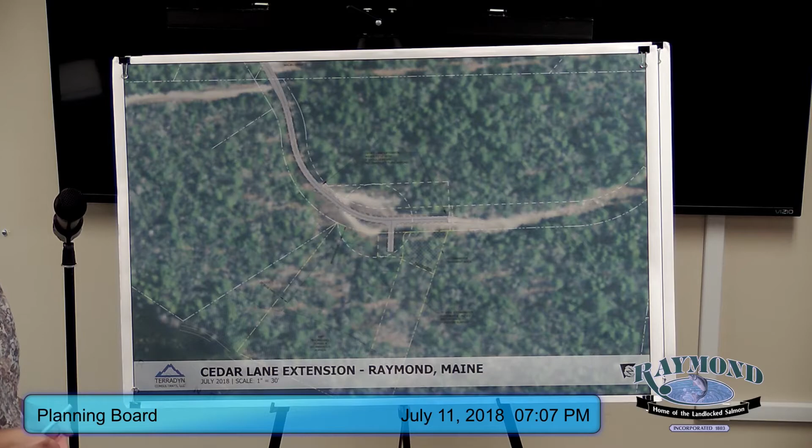We have two different roadway cross sections that we're proposing. We've talked about this a lot with the planner and code enforcement, and looked at the stormwater management for the site and protecting Panther Pond. We came up with this best approach.

The first section from Sloan's Cove Road down to Malibu Drive is going to be a 16-foot wide travelway with 2-foot gravel shoulders on each side, which meets the standards for a private way serving 4 to 10 residents, with the exception of that shoulder, where we're asking for a 1-foot reduction from 3 feet to 2 feet. That is one waiver we're asking for.

That will keep the roadway generally within the extents of the gravel that are there today, but improve the section so it's a defined travel way with defined shoulders, clearing vegetation back so it is a safe, accessible route, without clearing too much, changing the nature, or creating more stormwater than necessary near the pond.

After Malibu Drive, this portion of Cedar Lane only serves 3 residents, so we're requesting that we transition to the cross-section allowed in the ordinance for private ways serving less than 4. That would be 12 feet wide with 2-foot gravel shoulders.

Again, that's so we can keep the roadway generally in areas of gravel and maintain stormwater patterns. There are some existing ditches here that we're going to connect to and direct stormwater to, to manage phosphorus export and erosion control.

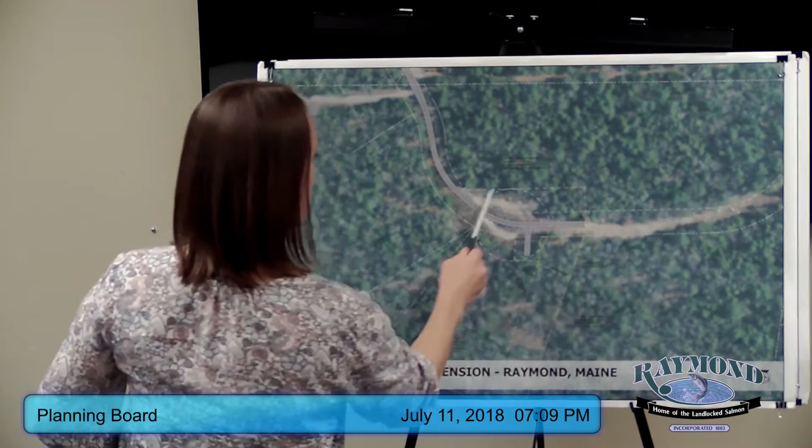This is all owned by the Yazbeks. At one time, this, this, and this circle were older right-of-ways that are being released as part of this to define the new right-of-way around the hammerhead.

This portion of it was created when the road was going to connect in a different location. There was a different right-of-way in place.

Well, I guess my question is, are we going to be back here in 1 or 2 or 3 years having the same discussion when additional lots are going to be developed?

I can answer that. We've had discussion with Mr. Yazbek. He has no intention of developing that. In fact, he wants to put it in conservation. It's all tree growth land now. He's adamant about it.

So I think the next piece is the Toles property, yes, and the same with them. And then the land up above is all accessed from Malibu Drive now, so.

So then I can show you this, which just has a little more detail of where we're really doing the bulk of the changes and construction. Everything else is just improving what's there and making some widened areas and better shoulders.

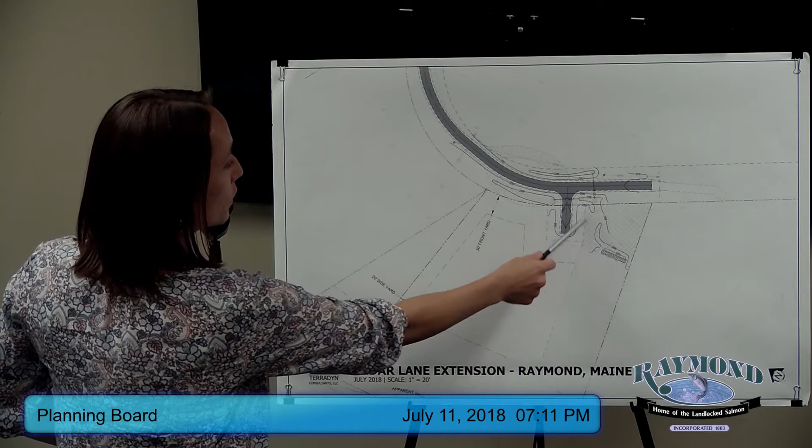This is where the biggest change is, so we'll be removing the gravel cul-de-sac, returning that to vegetation, which will help with stormwater runoff, and constructing this hammerhead to provide the frontage. We'll have ditching and culverts directing stormwater into this buffer area. All the stormwater report and phosphorus calculations were provided with our submission, and we believe we're sufficiently managing this.

Again, we're just asking that we don't have to widen the beginning of the road more than that 2-foot shoulder, to further help with reducing stormwater.

Does the planning board have questions? Yeah, I have one about the forested stormwater buffer.

Have you checked into that to see that the water's gonna flow where you want it? It's going to the Panther Pond, and laterally it's gonna stay in the property. The contours we have, everything is draining towards the pond. This area naturally today is collecting stormwater and running down this direction, so it seemed like a natural location to design this.

That will be a deed-restricted forested buffer and stormwater easement area. Fortunately it worked out that way for you, it's right where you want it. Well, yeah, they positioned it such that they can take advantage of that. That's why they wanted to pull the hammerhead back further.

Do we have any additional questions?

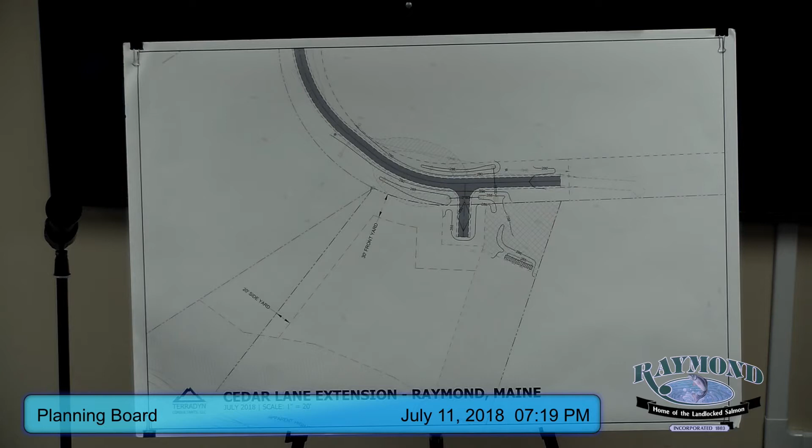Again, we're only accessing 3 lots down there, so it does give them ample room to back an ambulance or a fire truck and turn around per our standards. The other thing I've noticed is that by doing it this way, it's also going to help water runoff into the forested buffer. So there's an added benefit to that particular design.

Do we have any questions or further discussion before we move? No. May I have a motion to the floor, please? I'll move that we allow the applicant the hammerhead 55 feet from the terminus instead of 50 feet. Do I have a second? Second. What did you say the distance was again?

The distance isn't correct, it's actually back 135, I think. I'm sorry, I'm using the wrong number. It's all right, what is the number to use? The distance on the plan shows 135 feet to the center line of the hammerhead, roughly, plus or minus. I'll amend my motion to say 135 feet. Okay, we had a second made, properly made. Any further discussion? All in favor? Unanimous approval. Okay, now we have to get to the business.

Staff has recommended that we do this in 3 steps, if you will. We get all 3 on this one: private road, site plan, and shoreline zoning. So we can do this one of two ways. We've done the waivers, unless there's a condition attached to a technical issue, you could take them in a lump sum. You might just go through and get a poll, and if one has a conversation because of a condition or something, you can attach that, and then come back and move it all in one big motion. I like that. So you'd have essentially three motions with this, four. You'd have one for private road, one for site plan, and one for shoreline zoning, and then one for the whole final thing. Okay.

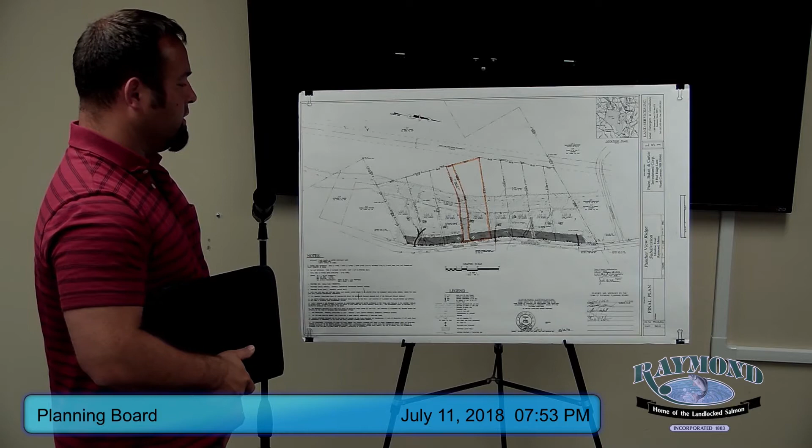At the time, I went through the files. I didn't see anything specific which talked about the design of any roadway in that 60-foot right-of-way. It was really just to provide some connectivity to that back piece.

There's a pole line as well, but it runs behind all the properties, so this is kind of a natural divide. The other homes are all on the Meadow Road side of the pipeline. The one exception here is this house, which had built out this roadway to a 15-foot wide paved road. They gave it a street name, Alfred Mann Drive.

There's currently 2 houses which utilize it for access, and they also have Alfred Mann Drive addresses. So this existing dwelling on lot 4, as well as the dwelling back here on lot 3, are the 2 dwellings that use Alfred Mann Drive.

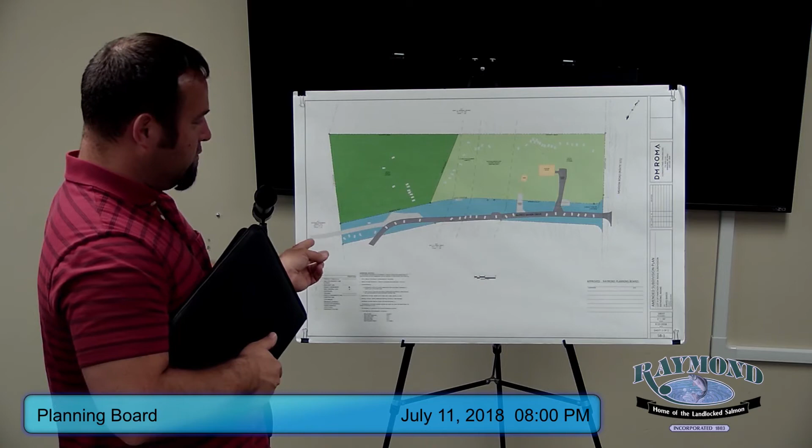One thing that would be a benefit to the site would be a formal turnaround at the end of this roadway. It was shown as a 60-foot right-of-way to access the rear land, so at the time it was set up there wasn't any intent for this to be a short dead-end road requiring a turnaround. But today we're now talking about a third house on this road, which essentially will function as a dead end. So it makes sense at this point to incorporate a hammerhead turnaround, which we'll design on our property and construct as part of the lot development.

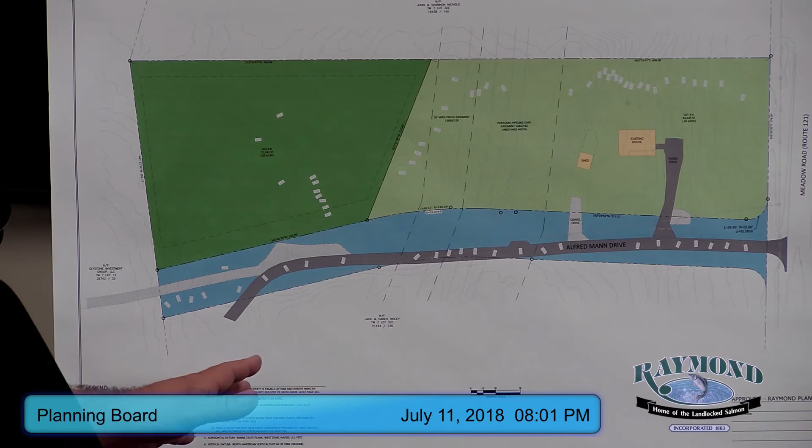Jim and I talked a little about stormwater management and what the ordinance requirements and expectations are. For the original subdivision, what they did was basically site the houses back. Panther Pond is on the other side of the road, so we're beyond the 600-foot shoreline zone, but within close proximity to the lake and sensitive to it, so we understand we need to do our part if we're doing further development to treat stormwater and provide erosion controls on the site.

Everything kind of drains in this direction. We're not sending any water toward the road that's going straight down toward the lake; it makes its way around this way instead. As I said before, with the pipeline being here, the backs of all these lots remain wooded.

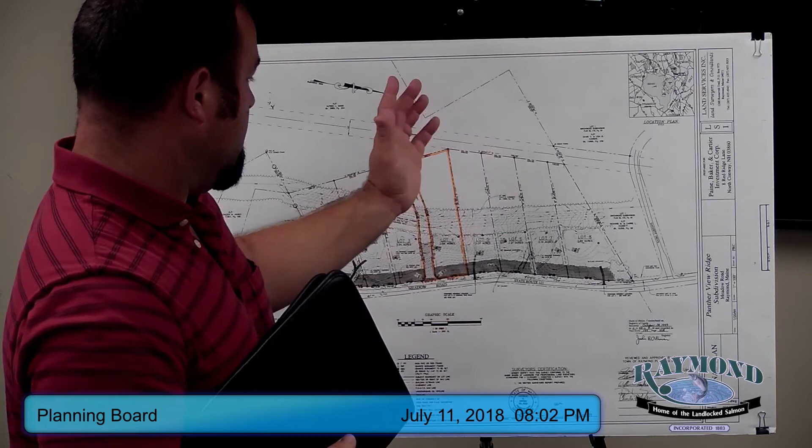You can see here the drainage pattern for this lot, number 4, comes down like this and then makes its way down this way. We'll provide some on-site retention of buffers, but once stormwater actually leaves the site, it makes its way down this way. There's lots of opportunity here where all the development is taking place on this side of the pole line, where the phosphorus is going to be removed just through natural drainage patterns that exist out there today.

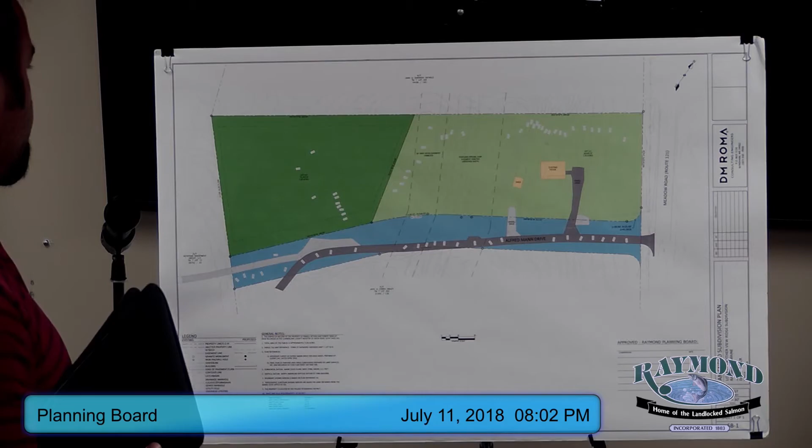So that's a summary of where we're at right now. We'd love to hear your feedback and things you'd like to see us elaborate more on when we come back with our full application, and we'll turn it over to you for some questions.

Okay, so I think we'll just open it up. Do you have any direct questions for our guests?

If you don't mind, can I step in real quick? This question will come up on this application and the next one, under the phosphorus ordinance. Really and truly, we can only impose phosphorus control when they're within 600 feet of the resource or the watershed. In this case, you're outside 600. The weird part is if it were site plan, we could, but under subdivision, we don't have that section. But we are requesting that each of these applicants, this one and the one that follows, do their best to incorporate some kind of measures for stormwater quality.

I think they're both going to abide by that to an extent, but I don't think either will go to the expense of computing that. But if we can at least see where the measure would take place, and in this case, if the drainage goes in this direction and they can utilize that as a buffer, that would be beneficial, and I think we can support that.

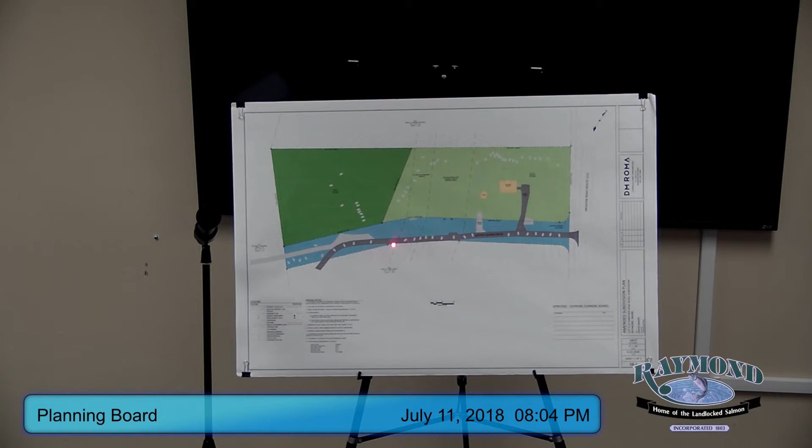This is the one piece I think we're having a little bit of an issue with — the road is not within, or is very close to the edge of, the right-of-way. It is a private right-of-way. We don't require it to be necessarily centered, but with that, any improvements need to be within the right-of-way. So I think that's a discussion the board might want to have: does the applicant have a way to improve that or shift it over so it's in the right-of-way, or is there any way they can extend the right-of-way to slide over so the blue is between the gray and the white here? And then the terminus — I think we're talking about a hammerhead, correct, in here?

So I think with all that, we'll be there. One thing I will add is that we didn't get comments from the fire department. I know on the one that'll precede this, there were some comments we received about putting sprinklers in, or maybe a cistern depending on the number of units.

Dustin, you may want to reach out to Wayne Jones, who's the new fire inspector for the town since we've had the unfortunate passing of David Maines. He will be conducting those, so you might want to reach out to him to see what the fire department may want. I know on the one after this, they've given them a few options of what to do. And I think sprinklers were actually, even back in '99, a condition of the subdivision approval for everything that was done to date.

Yeah, and that's the one other thing too — we'll need to take a look at all the conditions that were on the original subdivision plan, because they will apply to this lot. So when you put together that amended plan, just make sure you incorporate all of the conditions, waivers, and everything that were on the original plan. Because one of the things we're trying very hard to do is carry those forward in all documentation, so that there's continuity if it ever comes back again.

Do we have any general comments? I don't see that the board is adverse to the concept. With the rezoning in that particular area, it does open up the other side of the road for development. Is there any comments about that? Does the board have any opinion? We're taking these old 3-acre zone lots down, but it's allowable in that particular zone. No problem with that.

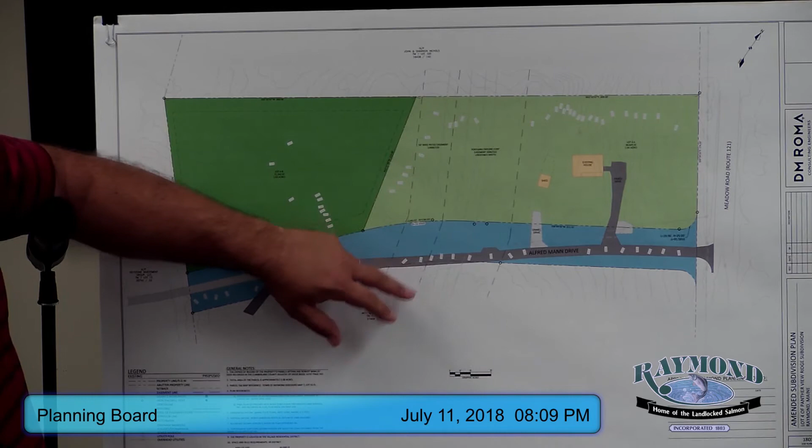When you cross the pipeline, as we know, that's another whole can of worms. If you relocate or do any other work there, you've got to deal with them. This was the only crossing of the pipeline; these other lots going through there are on the roadside.

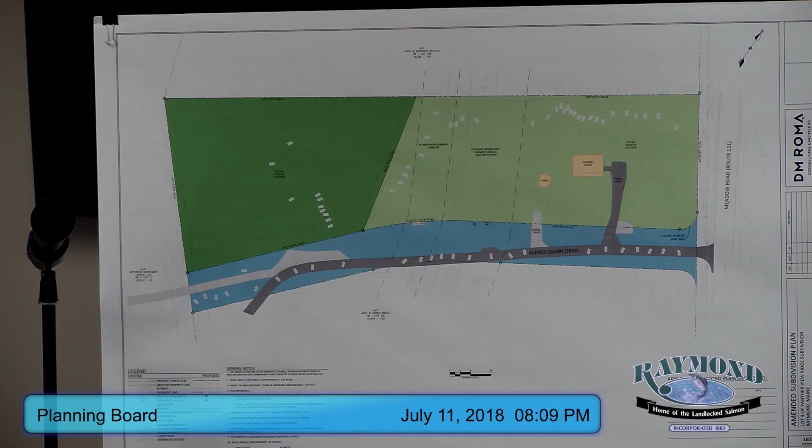Well, how does the board feel about that? Do you want to go see it, or do you think he can present a reasonable approach with his application? I'd be fine with seeing it on paper once it comes back. Paper's good enough? Okay, I think so. I'll submit some nice pictures of it.

And we rely on staff, you'll be checking it out too. And I think, again, if it is paved and a stable surface, then that's more desirable than to have it gravel or anything. Absolutely.

The other thing that comes up with a lot of these things is who's going to maintain this? I know you say it's being well maintained, but now we're adding people, how is the road going to be maintained? That'll all be firmed up in our application, it'll be crystal clear what's going to happen. Road associations are so much fun. We do our best to get them established, but then what happens afterwards is out of our purview. We should subject them to annual meetings, that's what we should do.

Any other discussion on this? I'm hearing the board is generally supportive of where you're going, Dustin. Are there utilities up through there? There's overhead power, I believe, that runs up the road. Okay.

There's actually a lot of really nice granite posts with private lights that run all the way down the road, with little gardens and trees. It's very well maintained, especially this stretch from the pipeline all the way back here. Again, there's a granite post with lights.

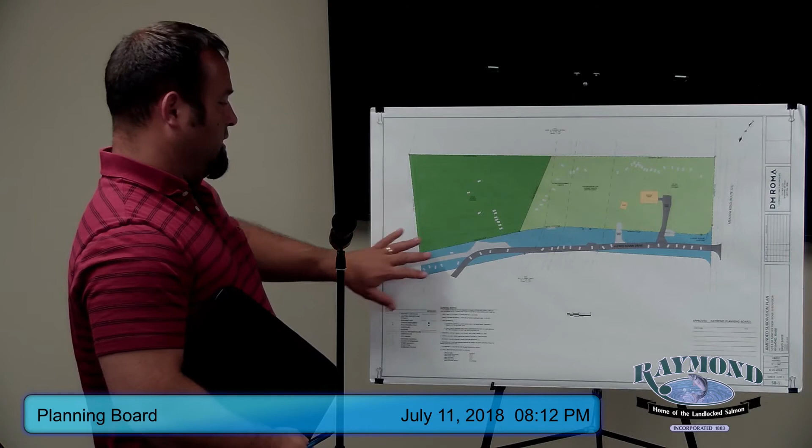We've got plenty of land, well above the minimum lot size, so if we had to put some more into the right of way that's fine. Again, the applicant is the owner of the right of way - they own it under their investment company on the abutting piece.

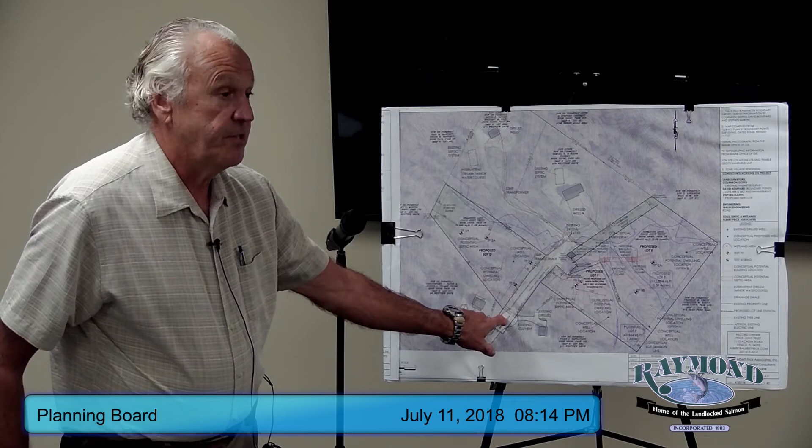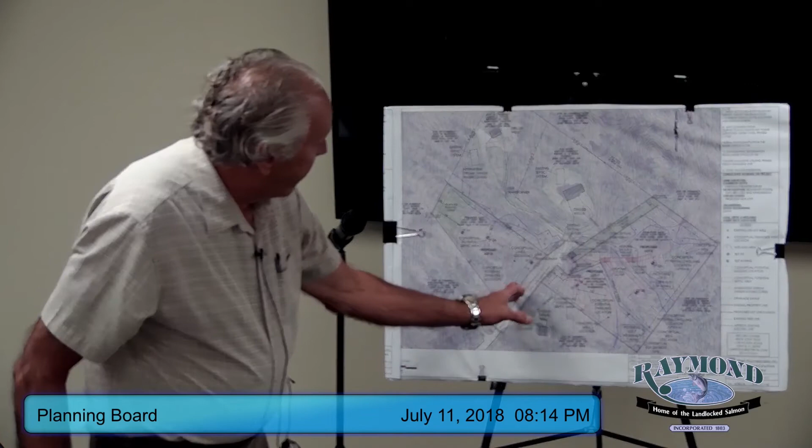My wife purchased the remaining land, which is shown on this site plan. I have the aerial here that shows the existing gravelled way and the hammerhead and the existing lots that have already been developed with code enforcement permits from Jack Cooper.

Subsequent to that, it was Will Cook. And then Chris Hansen followed up with this one. So they were all done with approval from the town. But what the proposed subdivision consists of is about

5.2 acres of the remaining vacant land. And if you look at the application, toggling between tabs 2 and 7 would show the tax maps and the dates that they were developed. So everything below this was developed in the late 1980s - the existing houses.

This lot, map 8, lot 48A, was sold and developed in 2001. My wife sold it to her brother James Mancini, and it was subsequently developed. This lot, 48B, was sold to my son, Grady Frick, who developed the lot in 2006.

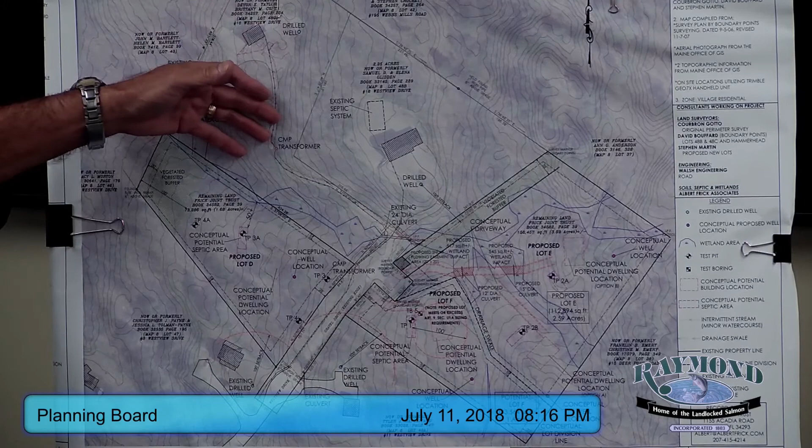And then this lot, which is 48C, was developed in 2010. We held title to that, myself and my wife, and my son Colin Frick built the house here, and it has since been sold. So these 3 lots are developed with single-family dwellings.

The town has the vacant land as map 8, lot 48, and it includes the parcel on both sides of the Westview private road, which now is a private road extension.

So what we're proposing to do is develop 3 lots. This lot on the westerly side is 1.68 acres and has the required frontage. On the opposite side, we're proposing to develop 2 lots, one of 1 acre in size, and the other one is 2.59.

And they all meet, to my understanding, the frontage and size requirements, and also the requirement under Article 9, section U1A, as far as having a 100-foot circle for an adequate house site, as demonstrated.

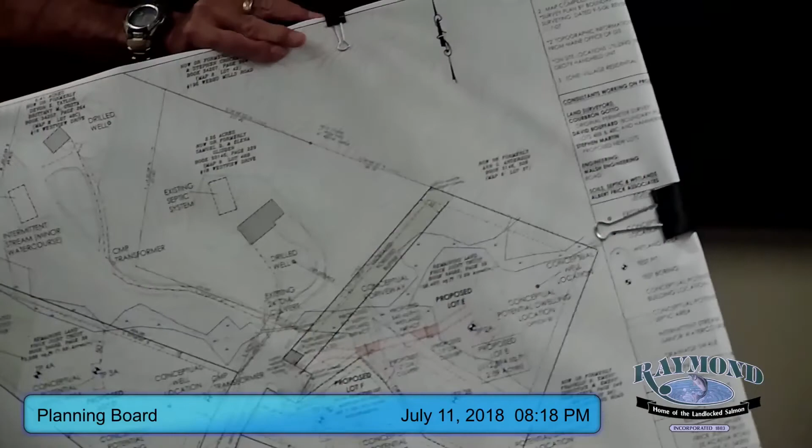Get some feedback from you with regards to phosphorus. Jim had mentioned to Dustin previously, I had read Article 9, Section U5A1, that phosphorus is subject to lots within 600 feet of a great pond or within 100 feet of a perennial stream. This parcel is 4,400 feet from Panther Pond and about 3,000 feet to Hayden Brook, which is the closest perennial stream.

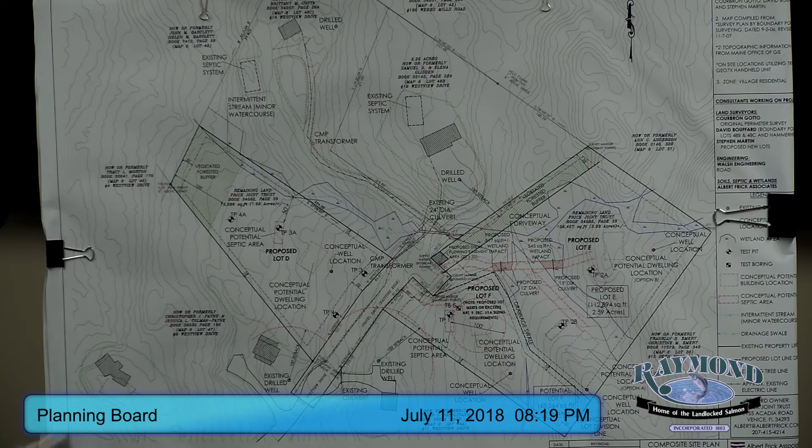So I was wanting to provide a forested buffer, but because some of the previous lots have been pre-developed with no requirements, and the difficulty to provide that with the drainage, I was proposing to cooperate in spirit but not be subject to the phosphorus program. That's what I wanted to get some feedback from the board on, that suggestion.

Well, I think, Jim, you mentioned earlier that based on the siting of these lots, the phosphorus control plan calculations, all those good things are not required. Is that correct? Correct, and I think in this case too, you've got a portion of that road already in, it's gravel. So whether it's gravel or pavement, it's already been built.

I guess the one thing I'll go back on real quickly is that this lot 8 was part of the parcel to remain, part of the original Westview Estates. And not that it's anyone's fault at this point, but any amendment to that lot, because it was part of a subdivision, should have come back even if it was a family subdivision, just through the formality.

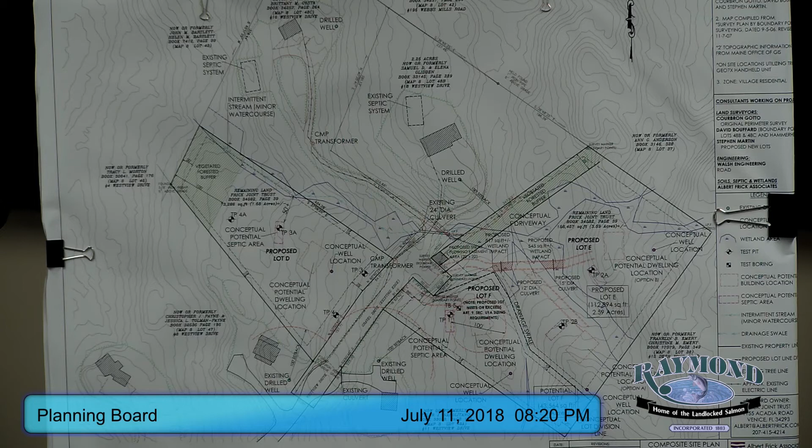But what we're going to do is just catch everything up at this point, even though these are two out parcels that have been developed. He's got them shown on here. We're only really looking at 3 lots, but again, it's just kind of a cleanup of the whole thing.

With regards to stormwater, he is correct. We don't really have anything in our ordinance to mandate he do phosphorus. I think what he's offering is a great start. I think the only thing we really have under the subdivision is quantity, so we will want to make sure that, maybe with the use of buffers, you can prove that you meet the peak rate of runoff, because that's really all we have in the subdivision ordinance for stormwater management.

And you've got quite a bit of land, even with the 5 lots, so with the buffers you may be able to reach that. I just don't know, spread it out, do whatever.

So that's one concern. He did get comments today from the fire chief and Mike Dustin. There are some options for a pond, a cistern, or sprinkler systems. Like Dustin's, the one you just saw before, I think we've already discussed that any of the conditions that were on the original subdivision plan would carry forward to this one.

And that was the only thing we were trying to figure out, the phosphorus - did it require phosphorus? Probably in 1986? No, probably not. It didn't. I think the water district came in, in the late 80s or 90s, the Portland Water District adopted the first phosphorus standard, so it probably predated that.

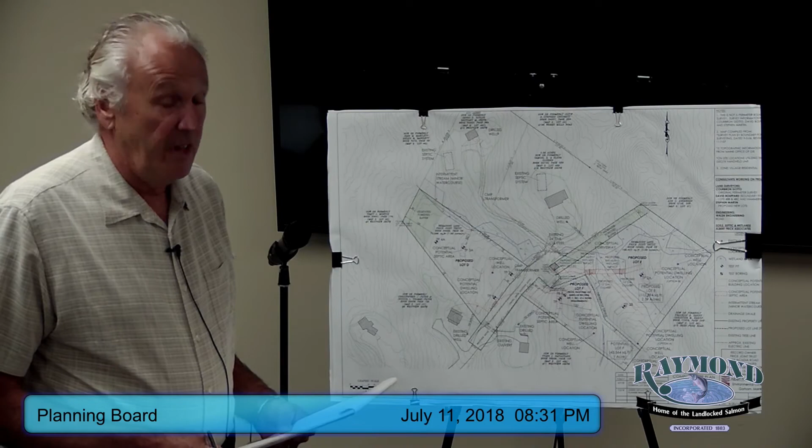Any other discussion or questions? Well, we appreciate you giving us a sneak peek, and we'll look forward to talking with you again. All right, thank you very much. I appreciate the time before the board. Thank you.

Okay, we're going to go into something completely different before we come back to more business. I asked that we put on the agenda tonight discussion of board officer positions.

As you know, I stood for and was elected to the Budget Committee. Raymond, under home rule, is a little different than the state of Maine, which says I cannot hold a position on the Planning Board and be a voting member and be on the Budget Committee at the same time. So that's going to force me to submit my resignation.

I've done some unofficial chit-chatting with some of the select board. I can remain as an ex officio member without voting power, and I am technically not in violation of that statute until such time I am sworn in. I have not done that yet, so I am getting a little bit of corralling from our town clerk to show up and get sworn in. But again, that becomes something for me to handle, how I want to handle that.

So what I wanted to do is throw this open. Greg is in a situation where he may or may not stay with the board. As you know, he's going to be a very busy guy dealing with the State House of Representatives. So we've got a couple of things kind of going on here, and we wanted to open it up now and talk about where do we go, guys.